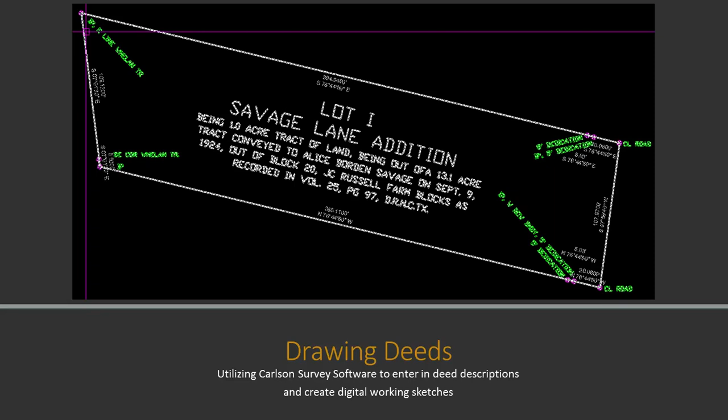The next one, Lot I, the same thing. It's a little more legible. On the east side, we have the right-of-way and the 5-foot dedication and iron pipes.

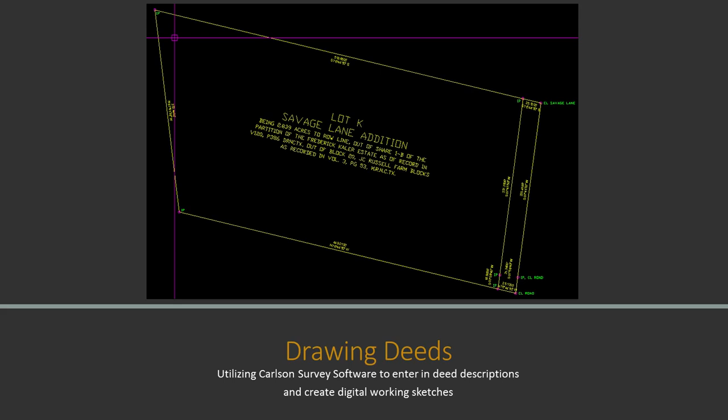I always like to give as much detail about the properties as far as the acres, the volume pages, the owner, what tract it's out of. That way you're not having to reference back to all those deeds and shuffle through a lot of paperwork. So here we have Lot K, and then we have good deeds and we have bad deeds.

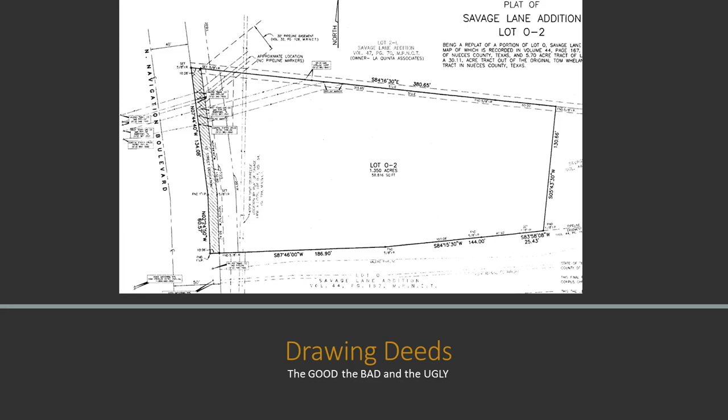So here's another one of the adjacent lots, Lot O2. It's pretty legible even at this screen grab and at this scale. You can see everything. There's a lot of things clearly marked, a lot of pipeline markers, a lot of right-of-ways and easements.

But then we have plats that look like this, and these are extremely zoomed in snippets, and still they're blotchy, and zeros and eights are hard to distinguish, threes and fives, fours and twos. And these become a problem when you're dealing with misclosures, and you're like, well, did I enter that in right? Should it have been a 3 instead of a 2?

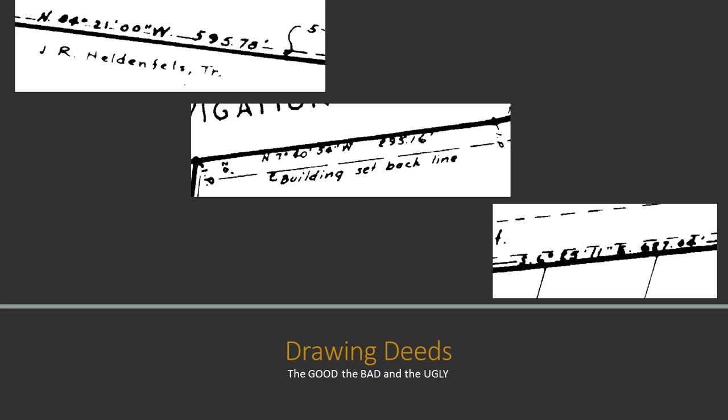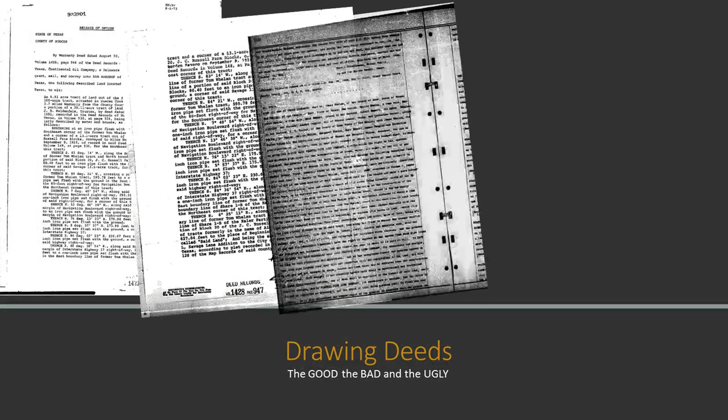When you get old descriptions like this or bad copies, it's just unavoidable, but it's something you have to deal with. And then descriptions themselves. Here's some old descriptions from the 50s and 60s and 70s, and they're typed, but they're still legible, even though that's a bad scan right there.

But then you'll get some old ones. This one is from 1893, and a lot of the descriptions from those areas, especially like the GLO, are more calligraphy style, and those are really hard to read. This one is actually very good penmanship, but the description of easements, for some reason, is usually very vague in older descriptions.

So this one basically describes a rectangle, going northeast, so many varas, and southeast, whatever, back to the place of beginning. They're describing that Tom Whelan tract, which is basically 100 acres, and that little sketch, the two lines going from north to south on it, is the easement, and they expect you to locate that easement based off that.

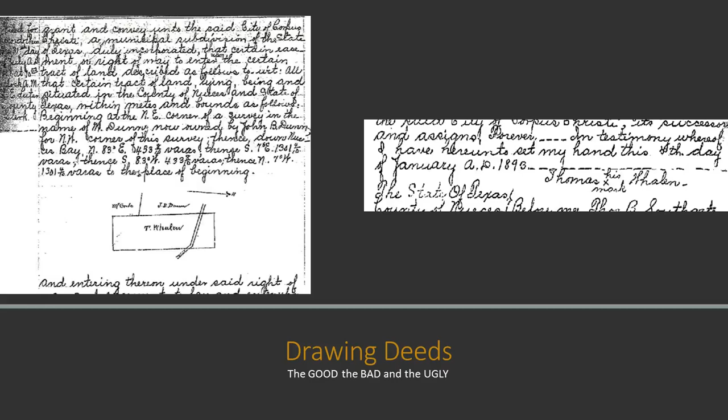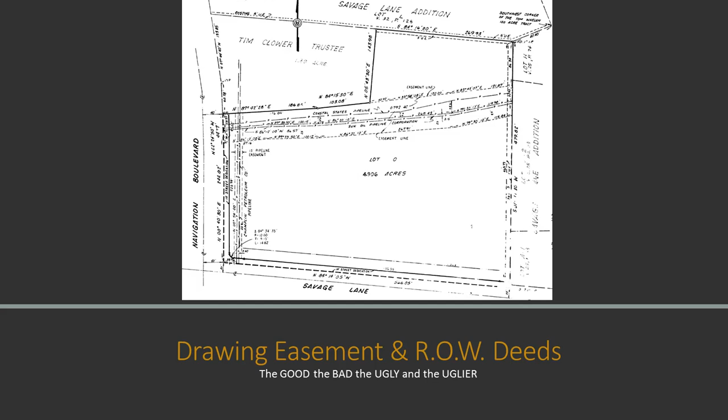Now, considering that our tracts combined are about 5 acres, and this is a 100-acre tract, and that's all I have to go by, this was causing a pretty big issue on this survey. And then we have some recent plats like this that show a lot of pipelines, and this was very helpful, especially for the ones on the west side that are going straight north that will affect the subject property. But you're going to have the good, the bad, and the uglier.

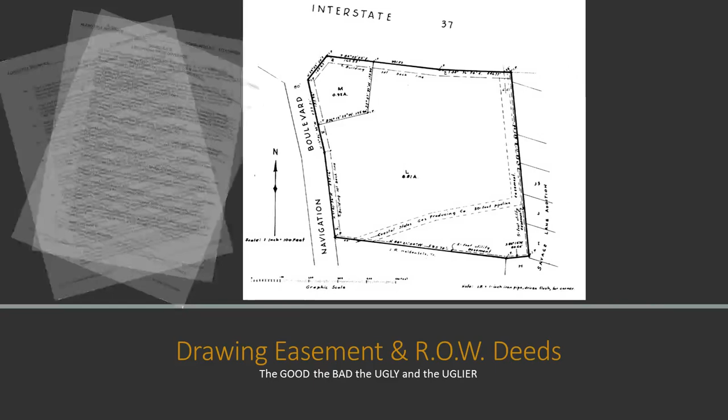And that volume and page basically took the original Lot L survey, and somebody just sketched over it and hand wrote and drew in a lot of these pipelines and easements. And yes, they numbered them, that's all great, but it's a bad scan, it's a bad copy, it's barely legible. And the note at the bottom, items 1 through 13 reference a title binder by Stewart Title Company.

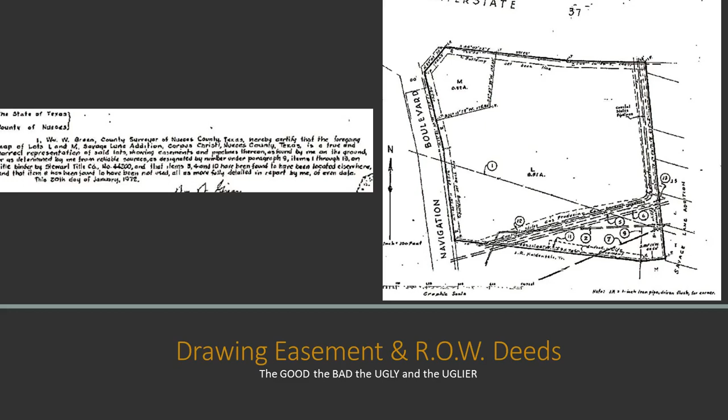Now, Stewart Title could not find this binder number 44200, and so these numbers were kind of meaningless to us. So we had to do a lot of additional research and follow little breadcrumbs and clues that would lead us to plats like this.

And again, it's just a hand-drawn sketch of the Tom Whelan tract, but you have a water line under a railroad and Shell Road, which since doesn't exist, or it's renamed something different. And then on the east side, you have Country Club. Now, there's only one country club that I know, and that's off of Everhart.

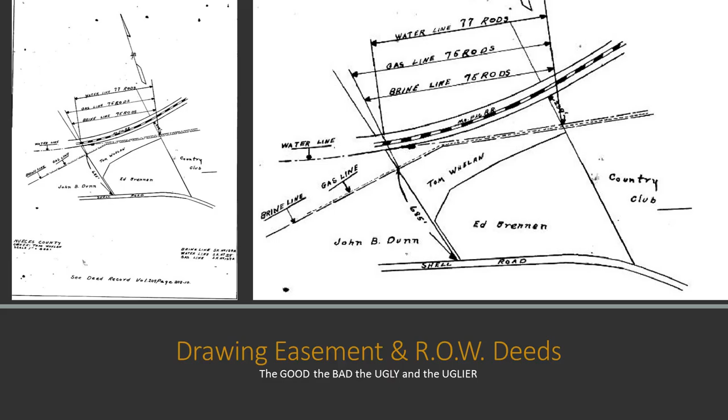But back in the day, there used to be a country club downtown, and that's the one it's referencing. This happens to be above Interstate Highway 37, so this is one of the easements that didn't affect the property. And the only way we found that out is through doing more research.

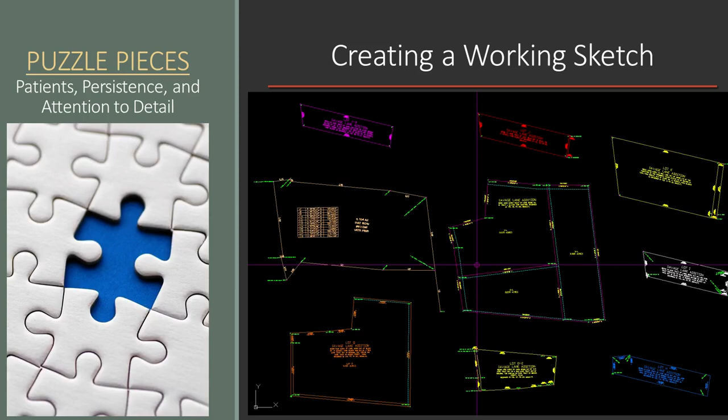So we have all of our deeds drawn, and they look like puzzle pieces. So that's what we got to do. We got to start creating our working sketch. We start placing the deeds together. Now Carlson is great and lets me set a projection in my CAD drawing, and that allows me to bring ortho images, aerial images from TNRIS into the CAD environment, and it allows me to place these deeds.

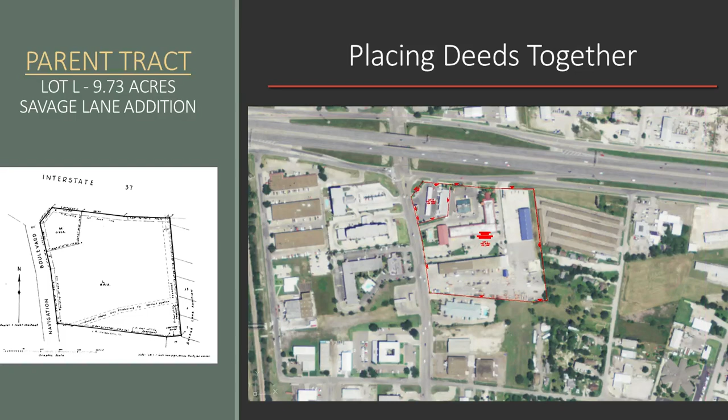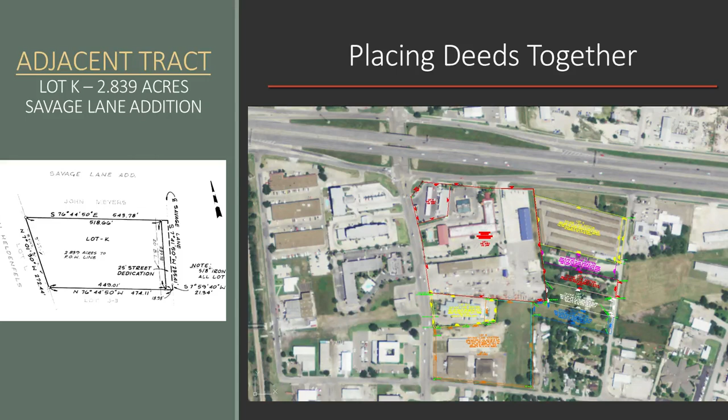And so here we have Lot O, Lot O2, and then we have H, I, and all of the adjacent tracts are now being added. And we're placing these based on what's called for in the corners and putting them together piece by piece. And here we have the Interstate Highway 37 right-of-way.

And we take away this aerial image and you see a better idea of all the deeds that are being placed together. And this is the working sketch now. We fit them as best possible, but these fit pretty well for a traditional surveying project.

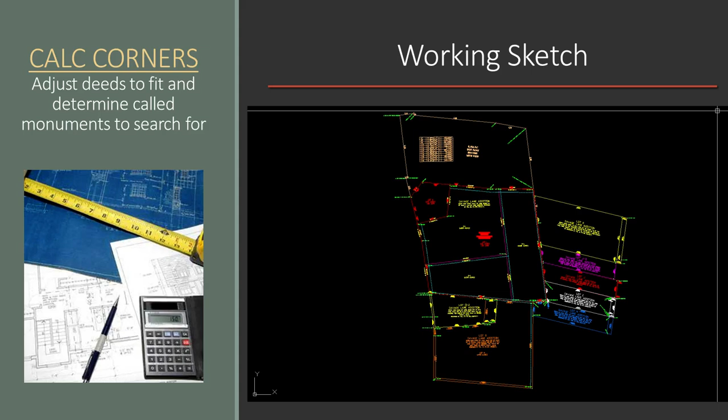But what about that Schedule B, that nightmare of all those easements? Well, here it is again. It looks like a Skittles commercial. You can almost taste the rainbow. All these pipeline easements, and this isn't even all of them. This is only the ones that we could actually track down and somewhat figure out.

So now it's time to go do some field work. If you spend the time to do this correctly, this is the easy part. Carlson allows you to just select points, and since everything's projected correctly, the XY coordinates that I get for these points off of this aerial usually get me within feet, sometimes inches, if I do it good enough, of the actual location of these monuments.

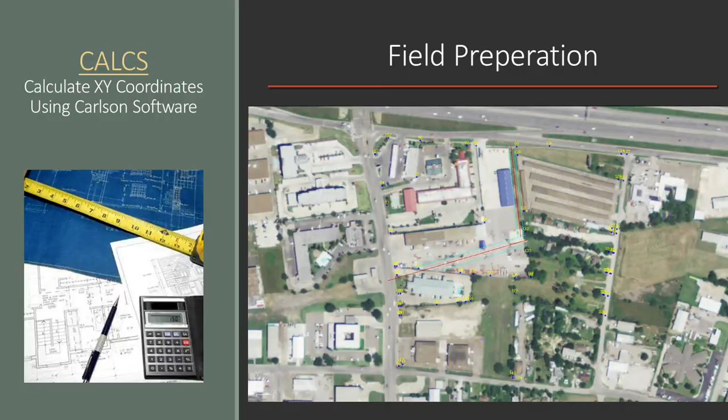So let's take away the deeds, and it may be hard to see, but you can see those blue dots with the yellow numbers, and those will reference. I can export those points into a CSV text file or an Excel file, and we can upload this straight to the data collector, so there's no manually entering anything, and we can start looking for points.

So field prep and project management: I'm going to need to give the guys control and the scope of work. We have a field request form that fills out all the contact information, who they're going to meet, where the site is, the NGS data sheets. For this specific project, we used existing control that we had already set.

I'm going to give them some aerial maps with the working sketch overlaid, and it's going to have the calcs, and those calc numbers will be there, referencing what's in their data collector. Sometimes I give them Google Earth images with directions, and sometimes even DXF and shape files that they can also upload into their controller.

Now, you also want to keep the contact frequent with the client, the landowner and your field crew. You always want to keep the client up to date. Always feed them information, whether you're behind schedule or ahead of schedule. If necessary, you need to contact some landowners as a basic courtesy or to gain access. You want to meet with your field crews and get them debriefed on the scope of work. And of course, you want to schedule the field work.